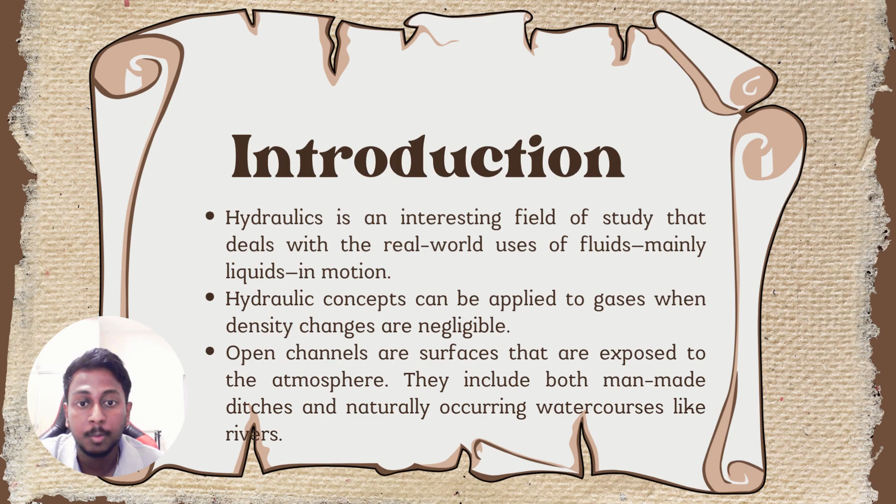There are two factors that affect the different flow rates of rainfall and runoff. Swales used for biofiltration and ditches adjacent to rivers, streams, and motorways are a few examples. Open channels are advantageous for irrigation and natural drainage. As their name suggests, open channels are essentially windows into the surrounding environment.

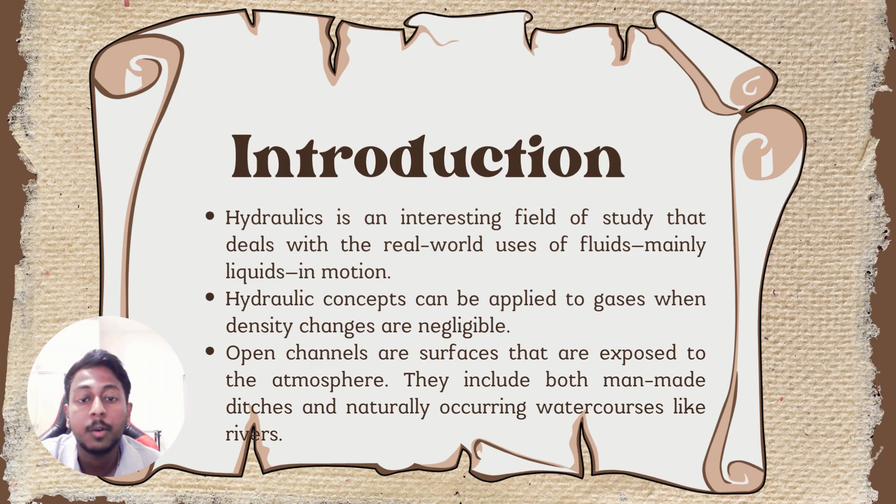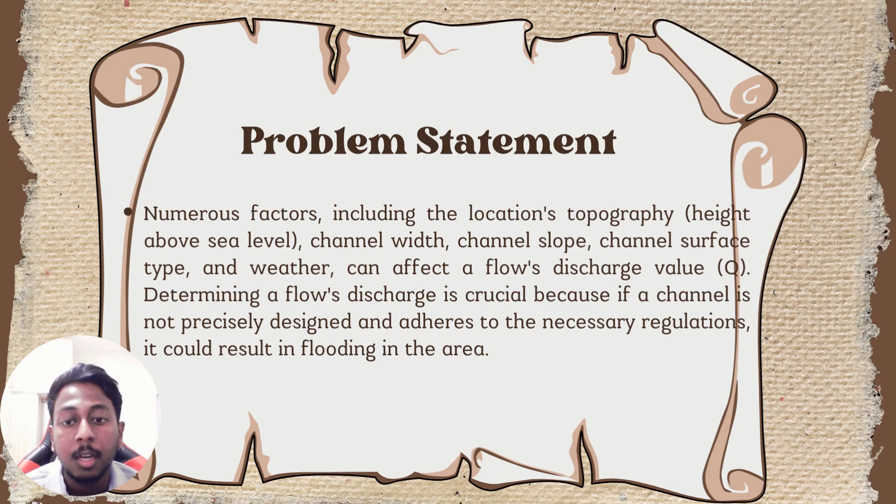Now I will explain about the problem statement. Numerous factors including the location's topography, height above sea level, channel width, channel slope, channel surface type and weather can affect a flow's discharge value. Then, determining a flow's discharge is crucial because if a channel is not precisely designed and adheres to the necessary regulation, it could result in flooding in the area.

And for the objective, number one, using the Manning equation and the continuity equation Q = AV to calculate the channel's discharge value Q under various weather circumstances. Second, to determine the type of channel that was used using the Manning coefficient table. Third, to figure out the flow and flow type, Froude number Fr.

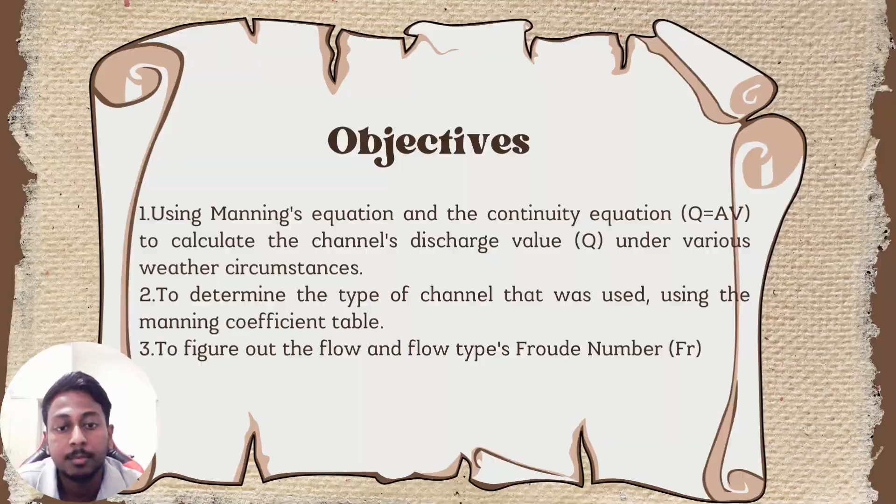The study focused on the drain channel adjacent to the C3 building at UTHM, which serves covered walkways for people heading to Building B at UTHM. Additionally, a nearby toilet influenced the selected drain channel for this study.

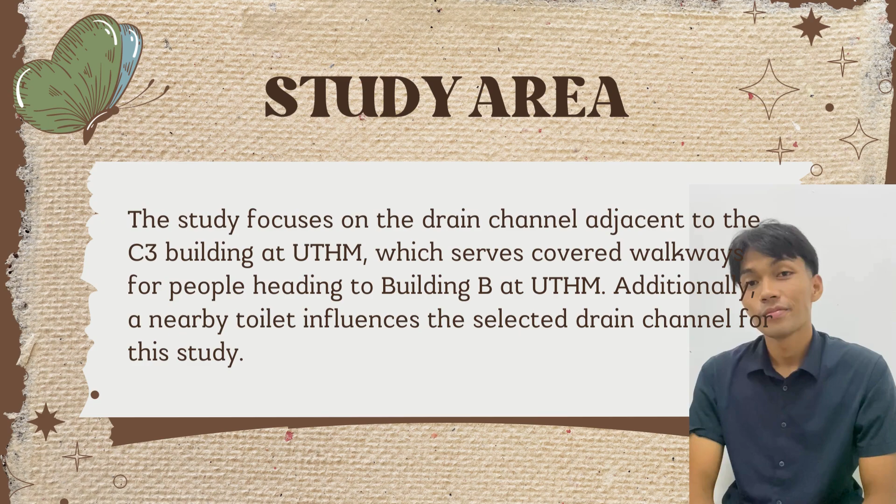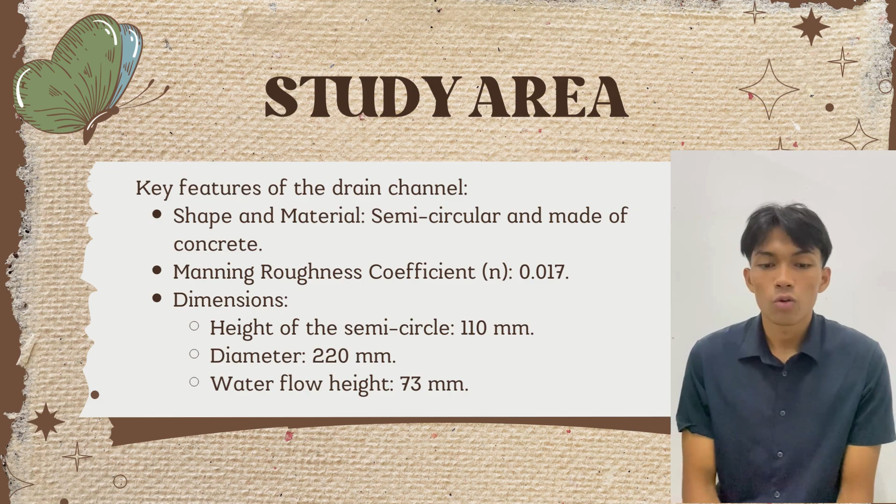Key features of the drain channel. The first one is shape and material: semicircular and made of concrete. The second one is Manning roughness coefficient, 0.017. The dimension: the height of the semicircular drain is 110 millimeters and the diameter is 220 millimeters. The water flow height is 73 millimeters.

Data collection detail, as you guys can see, date and time is 4 June 2024 at 12 p.m. The weather is cloudy. Procedure: the group members fill the channel with water to determine the velocity due to the lack of natural water flow. Environmental condition: no leaves and grasses obstruct the channel, ensuring accurate velocity measurement. Measurement points we take at inlet, middle and outlet of the channel.

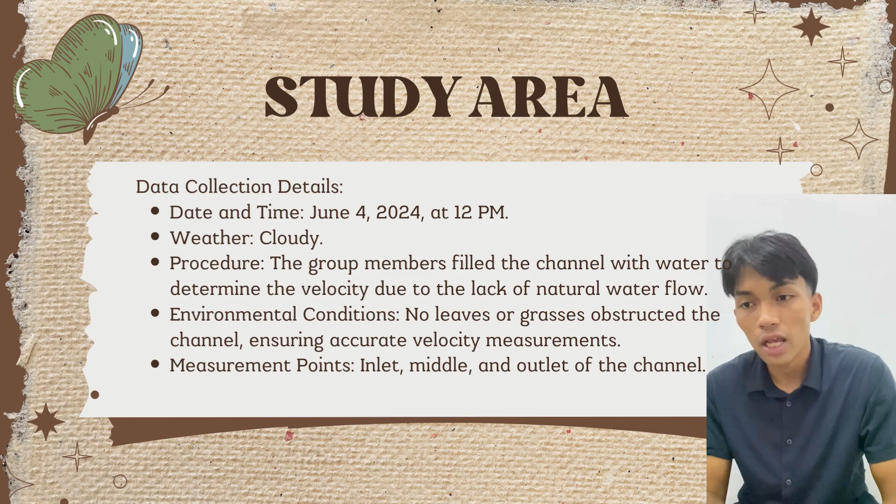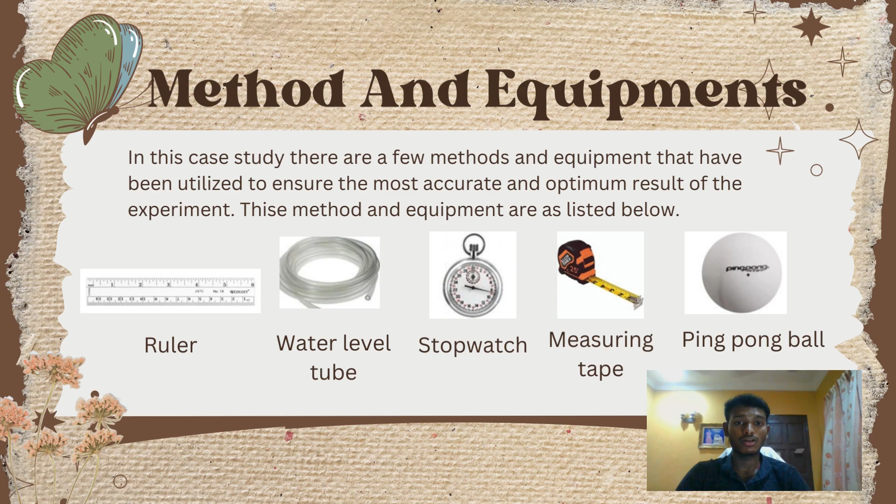Hi and welcome. My name is Sharvindra Analaki Escaliarasu and my matric number is 230196. And for my part, I'll be presenting about method and equipment. So in this case study, there are a few methods and equipment that have been utilized to ensure the most accurate and optimum result of the experiment. These are listed below: firstly a ruler, second a water level tube, third a stopwatch, fourth a measuring tape, and finally fifth a ping pong ball.

Next, we will see about the drainage slope determination. An instrument to match elevations of places too far apart to span with a spirit level is the water level. By measuring the height of the water at two distinct locations and the distance between them, the slope of the drainage may be calculated using the notion of water level. Then our group also used the tube and water method for this.

This is the most basic water level method, consisting of a clear tubing segment that is filled with water. The remainder of the tubing rested on the drainage ground, and the tube ends were kept vertical during the entire procedure. Next, with the distance between them set at 2 meters, the water level heights at the two distinct fixed sites, H1 and H2, were measured. The water level at both ends will be kept at the same elevation regardless of whether they are adjacent. And lastly, the ratio approach can be used to calculate the drainage slope.

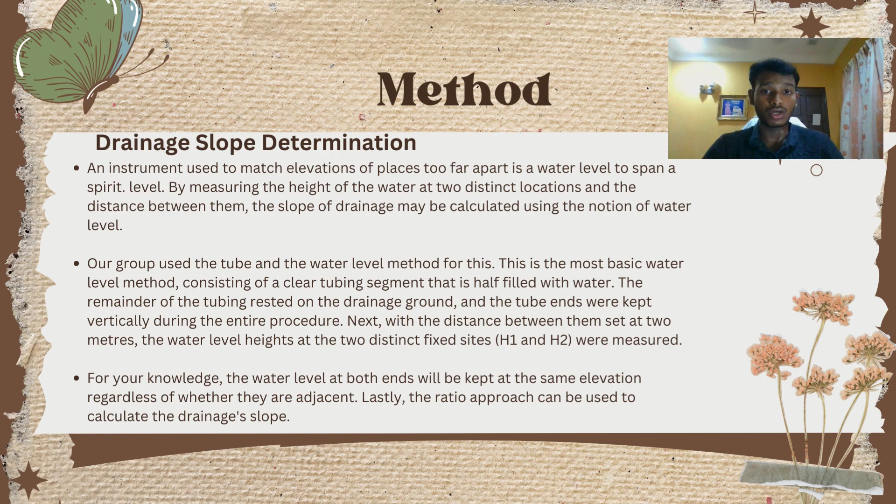Furthermore, we will see about the drainage geometry determination. The water level tube was placed along the inner side of the drainage to determine the curve of the drainage. Next, a measuring tape is used to determine the tube's length. And owing to the narrow drainage channel, a ruler was used to measure the drainage top width, bottom radius and depth. All the measurements were taken on site at three drainage sections, upstream, middle, and downstream, within the 3 meter reach to ensure accuracy.

So these data were used to determine the drainage area and wetted perimeter, which are displayed in the report analysis sections. So next we'll see about the on-site activities and investigation. To make the selected drainage function like a regular channel, first we must fill it with water, and then a ping pong ball was placed upstream within the 2 meter reach that we measured.

To put it briefly, the ping pong ball was chosen since it is lightweight, so its weight can be disregarded. The ball's journey from the upstream to the downstream was timed. And finally, the goal of this exercise was to watch the drainage flow and determine the approximate flow velocity. Thank you.

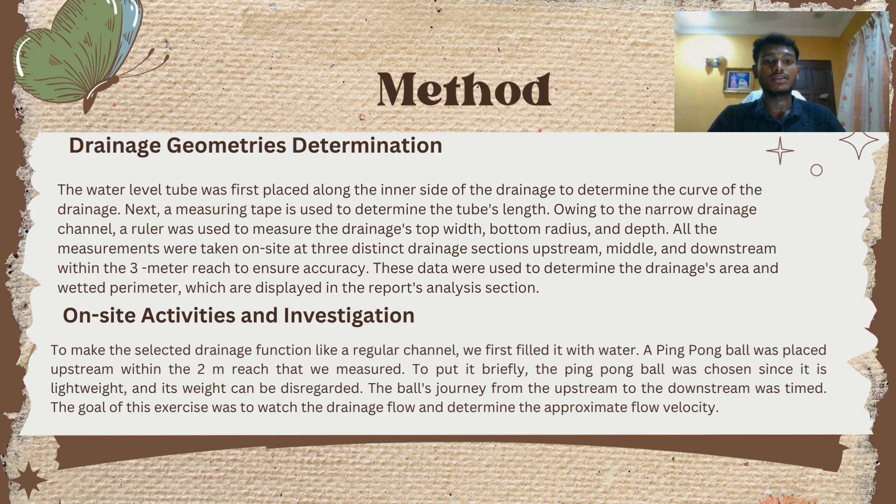Okay, this is the formula that we use to complete our calculation. First, we use the formula for the discharge. We use continuity, that Q equals the flowing area times the velocity. The second one is the formula for velocity. We use the Manning velocity, that V equals 1 over n times R to the power of 2/3, times S naught to the power of 1/2.

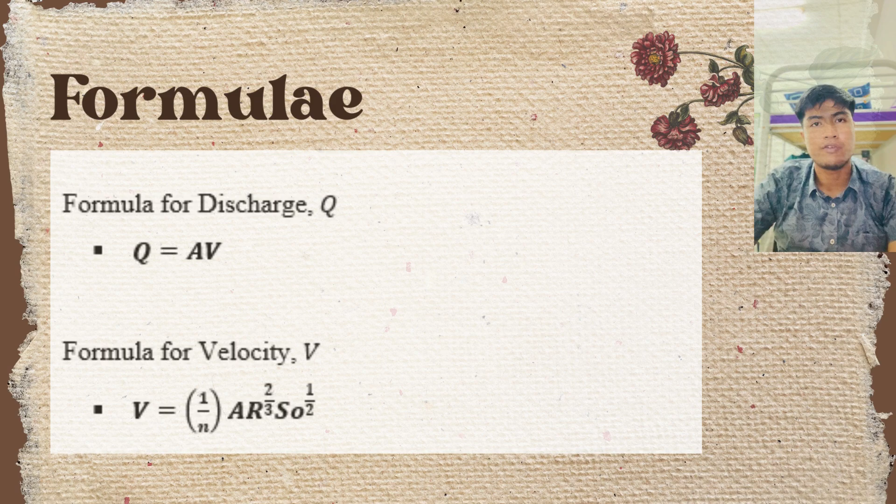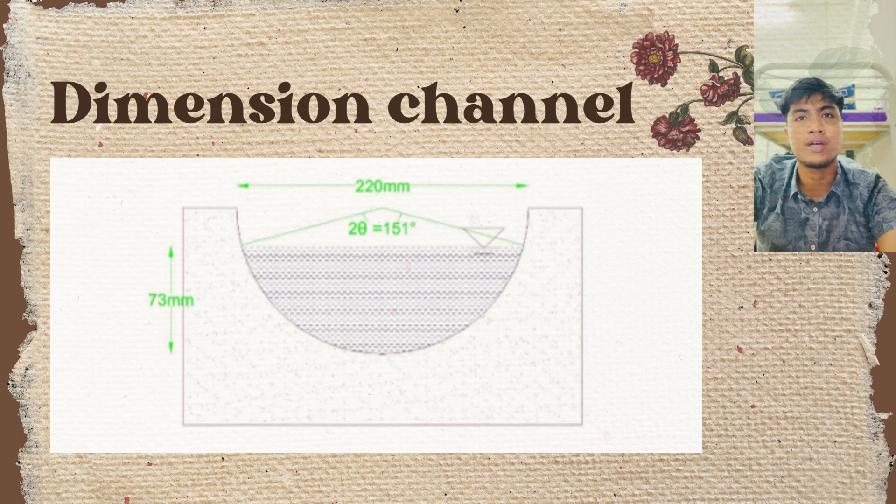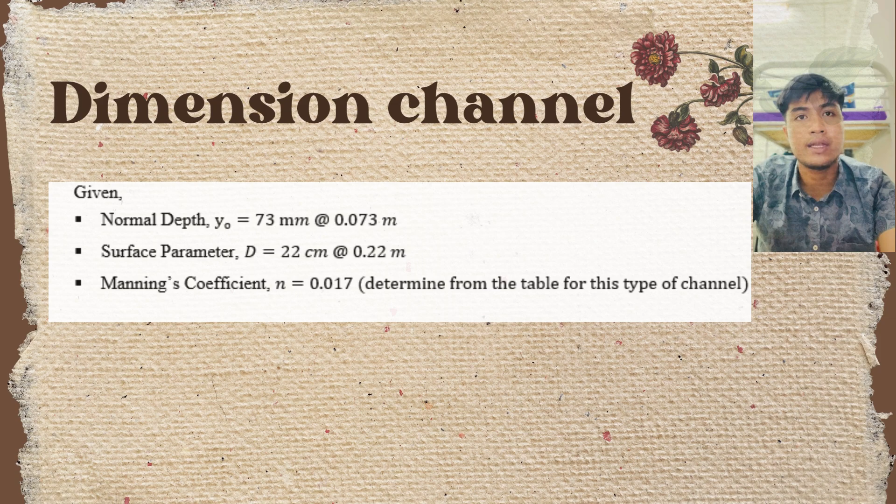Okay, this is the dimension for our channel. The diameter is 220 millimeters. We change to meters, it's 0.22 meters, and then the y naught is 73 millimeters. We change to meters, it's 0.073, and then 2 theta equals 151 degrees. For the normal depth, y naught equals 0.073 meters. The diameter is 0.22 meters, and the Manning roughness coefficient n equals 0.017.

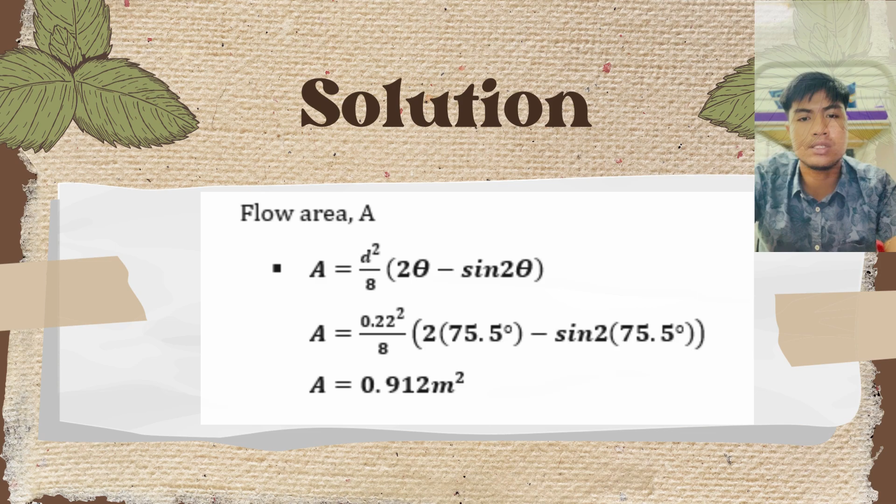Okay, first we find the flowing area. We use the formula A equals D squared over 8 times 2 theta minus sine 2 theta. After that we get the flowing area for this channel is 0.912 square meters. After that we find the wetted perimeter. The wetted perimeter equals theta times D. This is for the circular section or the semicircular section, and then we get the wetted perimeter equal to 0.29 meters.

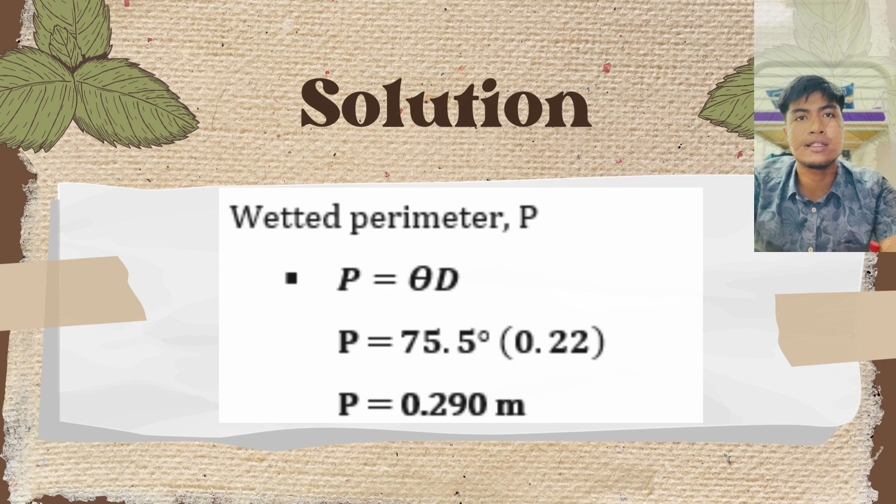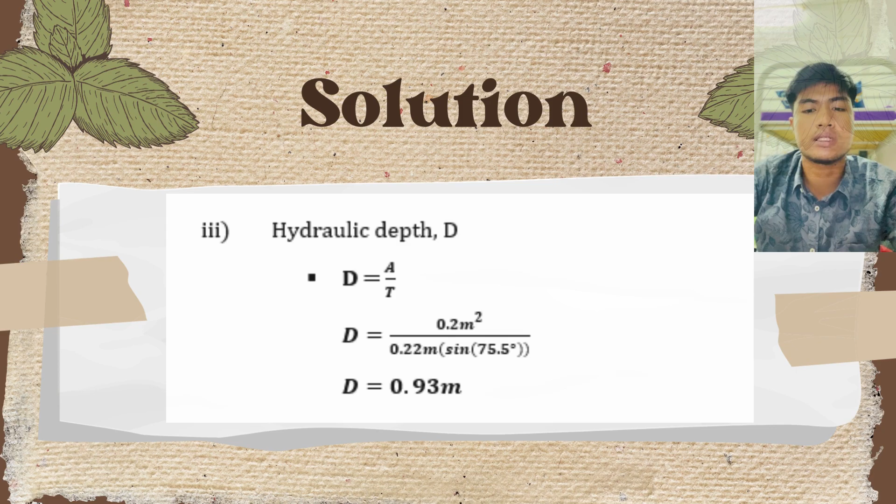Okay, this is the solution to find the hydraulic depth. As we know, the hydraulic depth equals A over T. For the circular or semicircular section, T is equal to D sine theta. After that we substitute into the formula: 0.2 square meters divided by 0.22 meters times sine 75.5 degrees, and then we get the hydraulic depth equal to 0.93 meters.

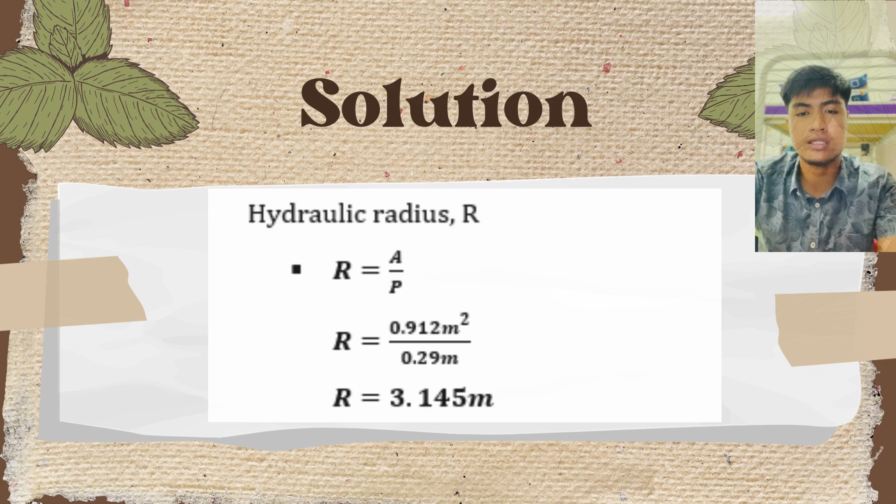After that we find the hydraulic radius. As we all know, R equals A over P, and we found the R value equal to 3.145 meters. For the velocity, we used a ping pong ball for 3 trials per section. The formula is V equals D over time. D is the distance that we chose, 3 meters per section.

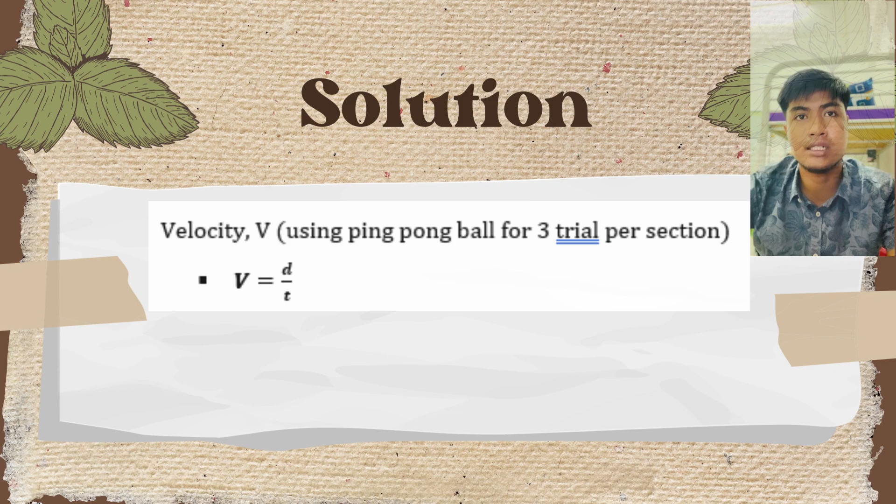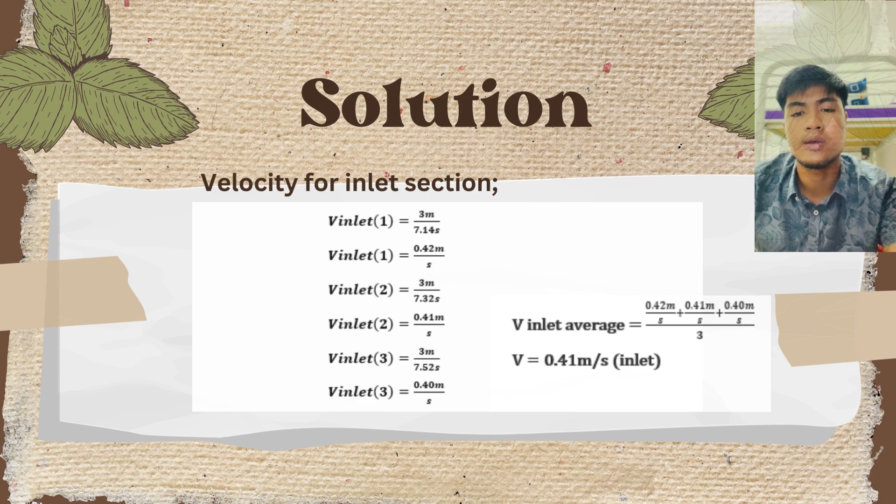This is the velocity we got for the inlet section. For the first trial we got 0.42 meters per second, for the second trial 0.41 meters per second, and for the third trial 0.4 meters per second. Then for V inlet we found the average of the 3 trials, and finally we get the velocity equal to 0.41 meters per second. This is for the inlet section.

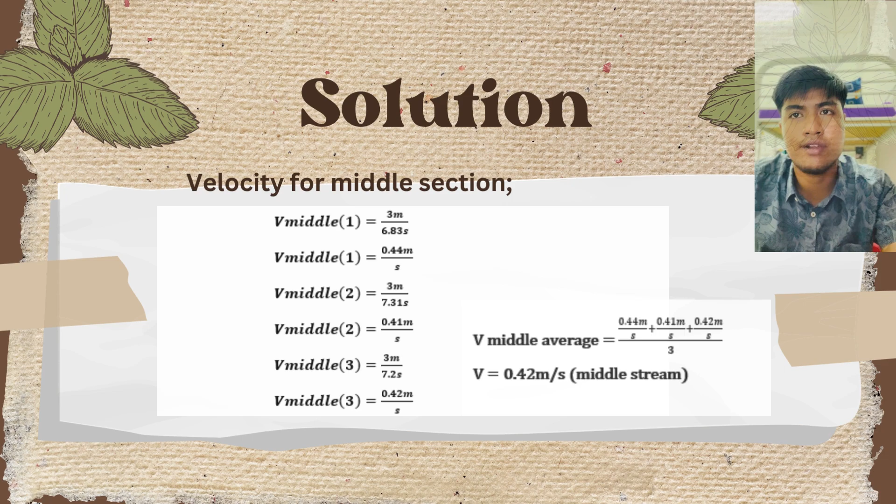This is the velocity for the middle section. In the first trial we got 0.44 meters per second, in the second trial 0.41 meters per second, and in the last trial 0.42 meters per second. We average it, and finally we get the velocity for the middle stream of 0.42 meters per second. This is the solution to find the bed slope, or S0, for our channel section.